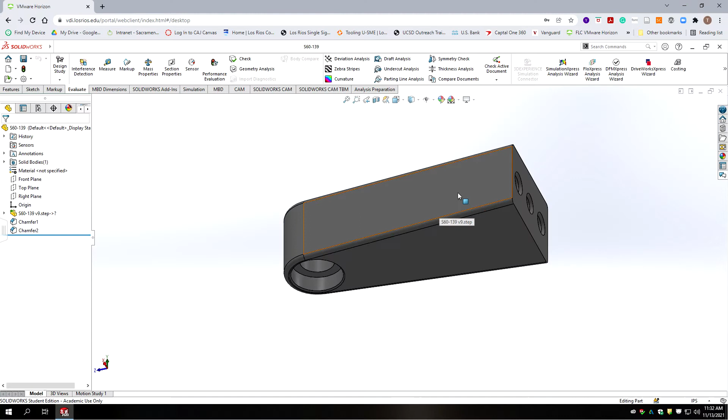So the method I will have you go through is a viable method to make this part, but there are different ways to approach this. Okay, so without further ado, we're going to move on. So we've got our part, and we're starting off with bar stock that's roughly the same profile as the footprint. I believe it's 1/2 inch by 2 inch, and it should be pretty close to our overall width here.

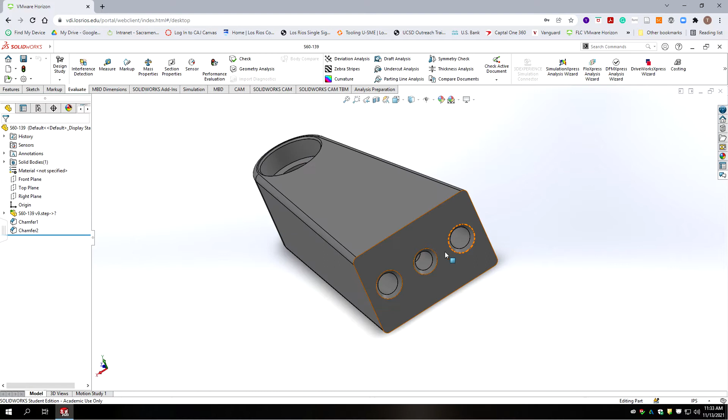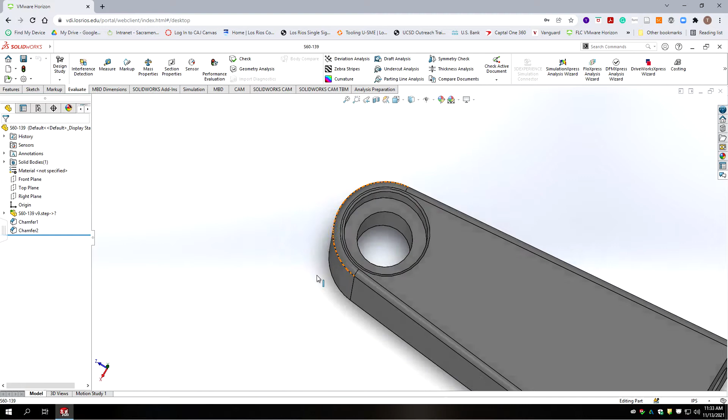We have 2 close diameter dowel pin holes and a threaded fastener hole in the center, which is a 6-32. Those are the same scheme as we used in the plate that this mounts to. We've got a loose tolerance 1/4 inch hole here, which we'll drill, and then we have a tight tolerance bore here, which we're going to approach carefully. And then we should have a 30 thou round going around the outside edge here, and we're going to use a corner rounding end mill to achieve that.

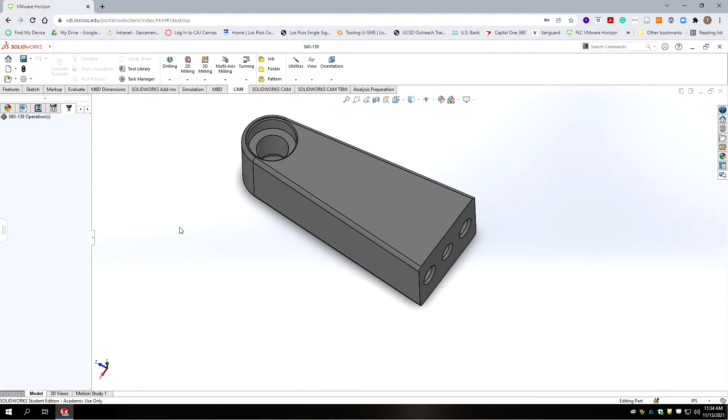So I think the minimum number of setups for this part is 3, so let's go ahead and create our 3 setups. Our first setup is going to be roughly in the position that we are now. So bar stock, perhaps on a vise with the right hand end sticking off the edge of the vise so that we can mill that face nice and square to all the other features.

All right, so we're going to highlight our operations. We're going to create a job, and that job is going to be S60-139 OP1. And we're going to use a relative size box, and we are going to use some extra material. So our additional stock, we're going to select all sides, but we're really only going to add it in the x-axis. Actually, we're going to set our origin first. So we're going to do z-axis and y-axis. We don't really have a good x-axis reference other than these holes.

Okay, so our z-axis is going to be the face of the part, and then our y-axis we're going to set as a vertical edge on the part. And so we get our trihedron where it's supposed to be, with x pointing to the right, y pointing away from us, and z pointing straight up in the orientation of the spindle. We're going to use a stock box point, and we're going to use the bottom corner 3, and it puts it at the bottom of the part.

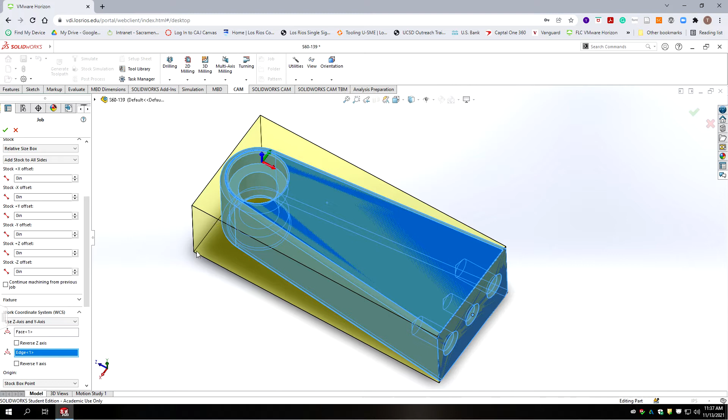Okay, so scrolling back to our stock, it's a bar stock, 1/2 by 2. But we're going to extend the ends as if we would cut this on a bandsaw, and it's rough stock. 30 thousandths, so a total of 60 thou. Okay, so that represents our stock with a little bit of margin on either end.

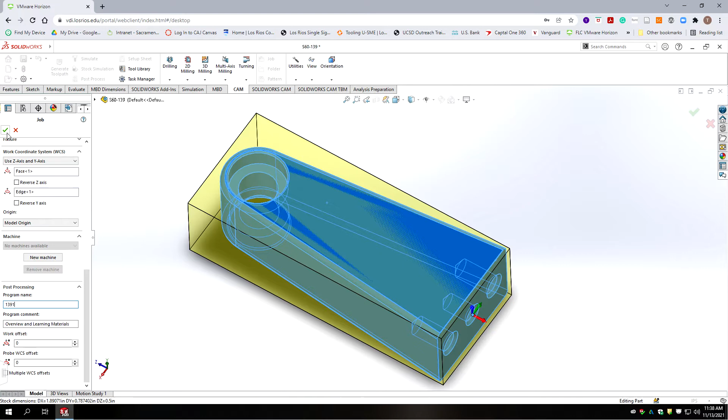And then our program comment is pretty much going to be the same as what we had up here. Program name is going to be 1391, the first program. And then we'll go ahead and hit accept on that. Now let's change our job folder to S60-139 Op1.

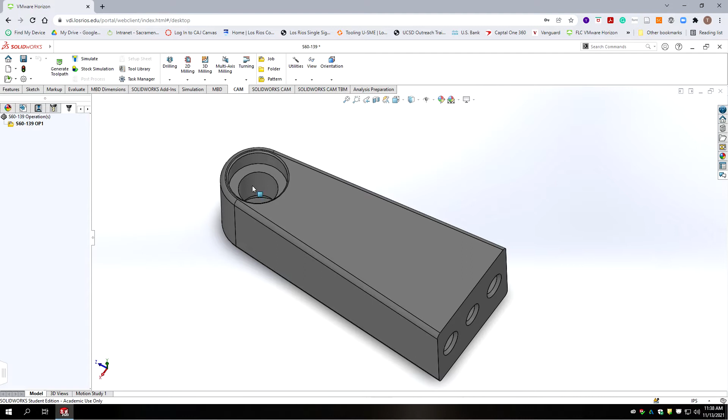Let's go ahead and start programming this. And for our Op1, if we're holding this in its rectangular stock like we have shown, it's held in a vise, perhaps we hold on to the first quarter or eighth inch of material. We don't want to cut all the way down to the vise, so we're running the jaws around the profile. So what I suggest we do is we have the end hanging off. We can cut that face all the way down to the end, which will make it square and parallel.

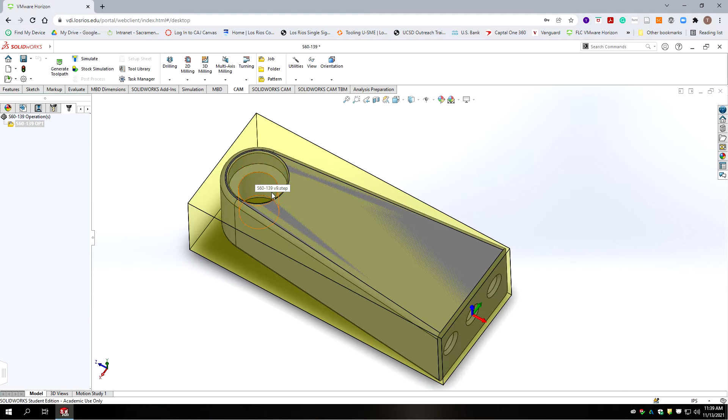And then on our second side, we don't need to machine that edge. In fact, that edge could be used as a datum. Okay, and then we have our hole. And then we have our counterbore on the one side. Now the counterbore is very precise, so we could use that for location when we flip the part. Yeah, I suggest we do that.

Okay, so what we're going to do is first we're going to cut the hole that goes all the way through. So we're going to do a spot drill, then we're going to do a 1/4 inch drill, and then we're going to come back with an end mill to make the pocket. And then the next step is we'll use that same end mill to run partially around the profile in depth and then machine off the side face of the part, so that's qualified.

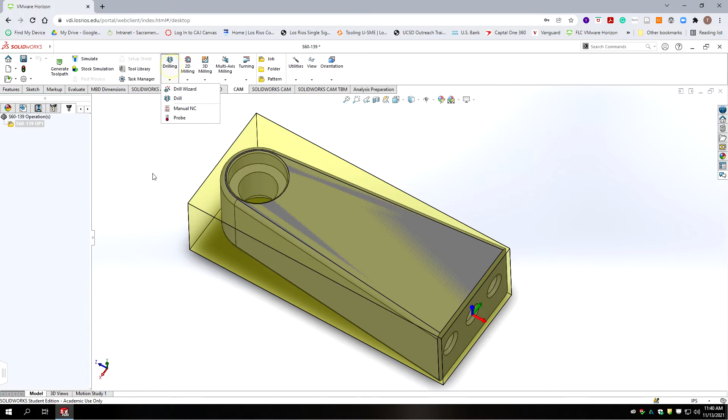And so in that setup we'll be establishing the distance between this face and the center of the hole feature in one setup, which is more accurate than if we do that in multiple setups. Okay, so now let's start, like I said, with the hole. So we're going to go to drilling, and we're going to do a drilling operation. And from our library, we're going to grab our spot drill, tool number 6.

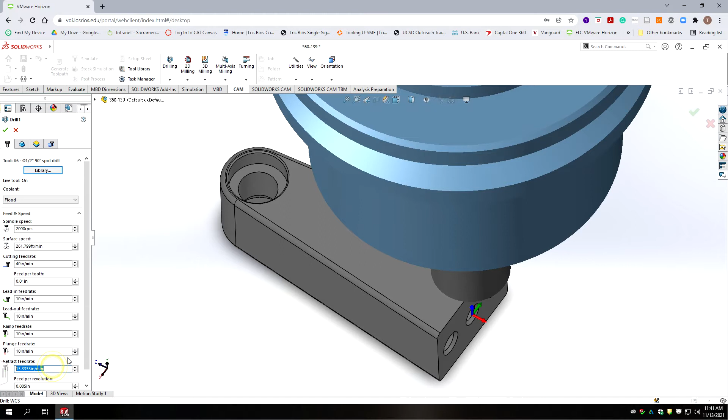Okay, and again, we're cutting steel, so we're going to slow our RPM down. And we're going to go to 10 inches a minute on everything. So we're going to go nice and slow with this cutter so that it doesn't flex, doesn't break the tip on it. Okay, we're going to go into the next step. And what are we drilling? Why don't we just select the chamfer? That's enough for the spot drill.

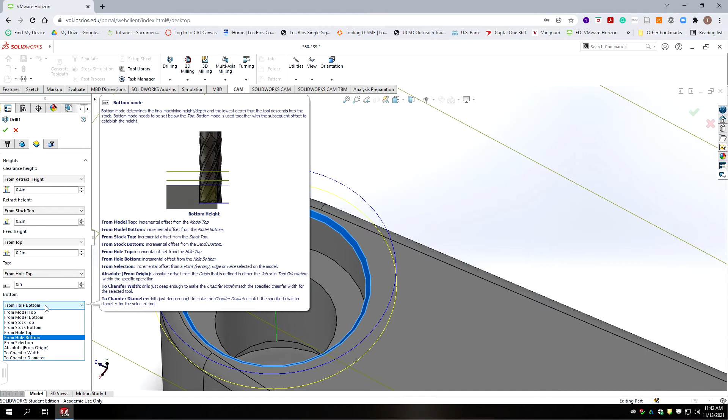We're going to go on to the next step. We'll leave all our heights at default, but we're going to go from the top of the hole and then our reference for the depth is going to be the top of the hole as well. And we're going to go to evaluate, and we're going to measure that diameter of that chamfer, and it's 400 thousandths. I'm just going to go and increase my significant units just to make sure.

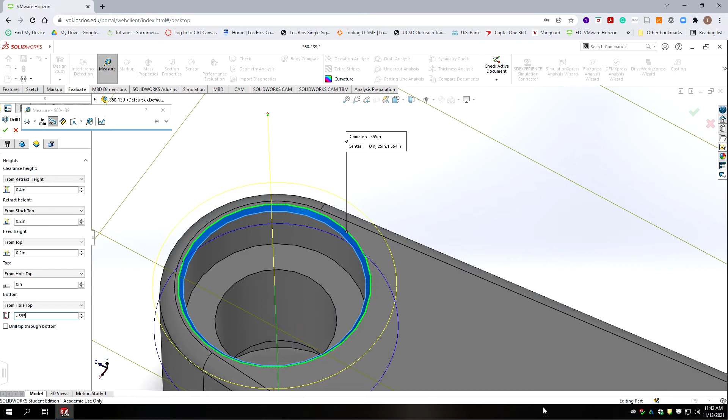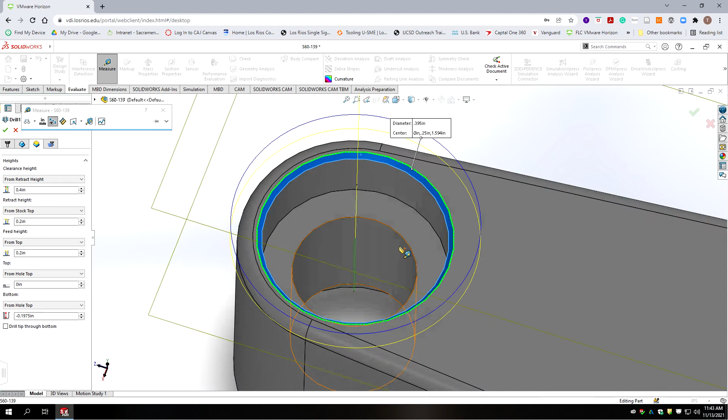Okay, it's 395 thousandths, so we want to go half of that. So we're going to go negative 395 thousandths divided by 2. Okay, and that should give us the proper depth to make the chamfer on this hole. It will also center drill enough that you'll still have a center point left for the 1/4 inch drill bit that goes into this. And it's possible we might actually be adding a slight chamfer to the edge on that hole as well, but that's not that critical.

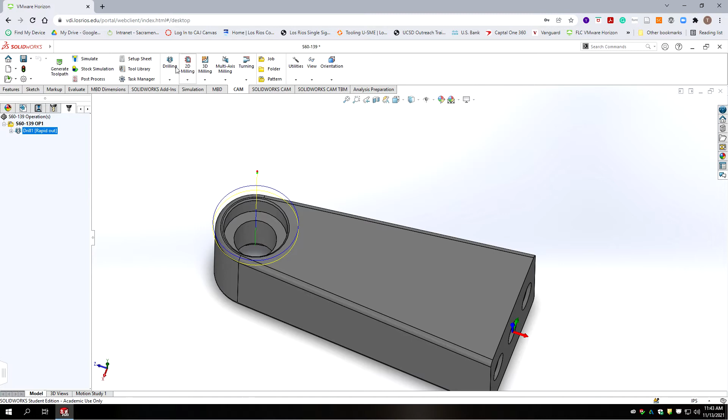Okay, so we're going to go on to the next, and we're doing a drilling. It's just going to rapid out. That's good. This is the spot drill. And we'll go ahead and accept that routine. Okay, the next step is we're going to drill the 1/4 inch hole. So that's the letter E drill. So go to drilling, drill. We're going to select from our library. We're looking for the letter E drill.

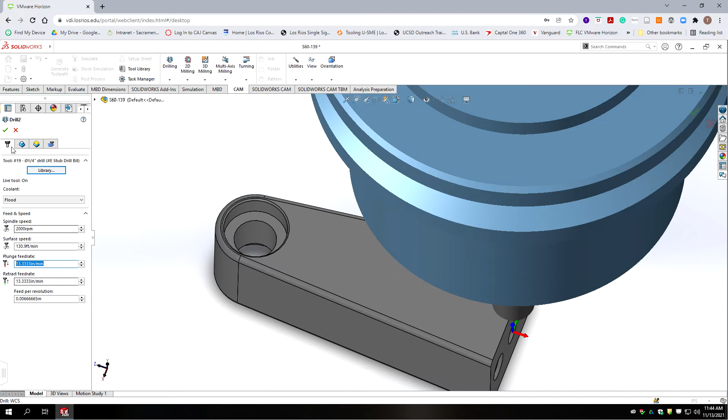Okay, and then again we're going to go down to 2000 RPM because we're cutting steel. We'll leave it at 13 inches a minute. It's fine. We're going to select the entire hole series. So we're going to get the chamfer. We're going to get the outside cylinder. We're going to get the cylinder of the 1/4 inch hole. And then we actually want to get the counterbore on the opposite side.

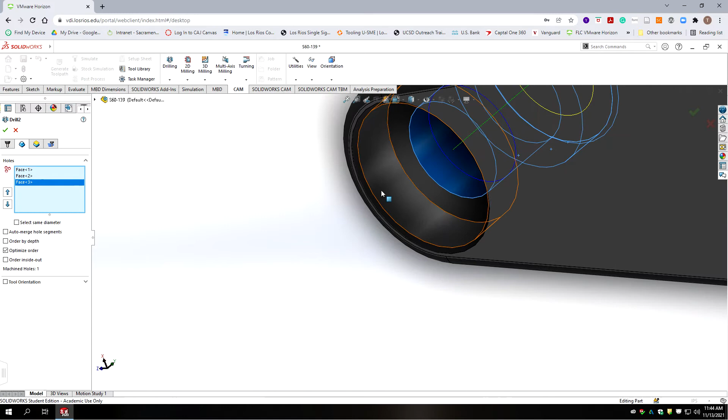In steel, a 4-flute end mill that we're going to use doesn't cut right on the center of the cutter very well, if at all. So we want to make sure that our drill bit goes all the way through so that when we machine from the other side, we have basically a pilot hole in the center to start with for our end mill. Okay, and we're going to auto merge those so it's all one drilling cycle. And then we're going to go to heights. We're going to leave the top two at default.

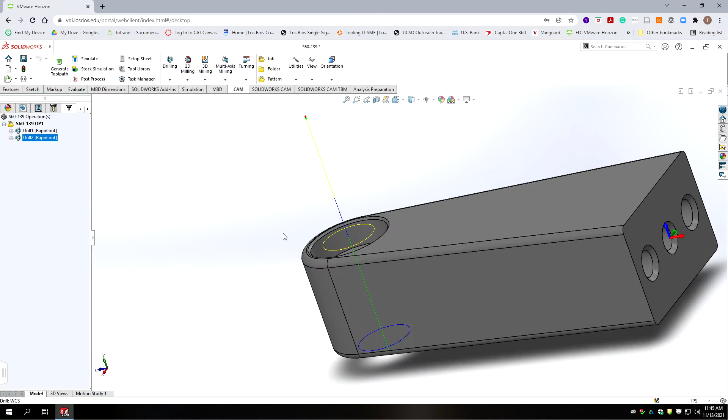And we're going from the top of the hole to the bottom of the hole, and we're going to have the tip go through, and we're going to go a little bit deeper. So we're going to go 0.01, ten thousandths deeper, just to make sure we go all the way through. Alright, so we got our 1/4 inch hole. Moving on. Now that we've drilled that hole, we're going to do 2 routines to make the counterbore.

The first routine is going to rough the counterbore, and then we want a separate routine that's going to do the finish cut. And here's the reason. This is a very precise size on our drawing, and it's for a press fit bearing. So we want to be able to separate out the code just for the operation that does the finish cut.

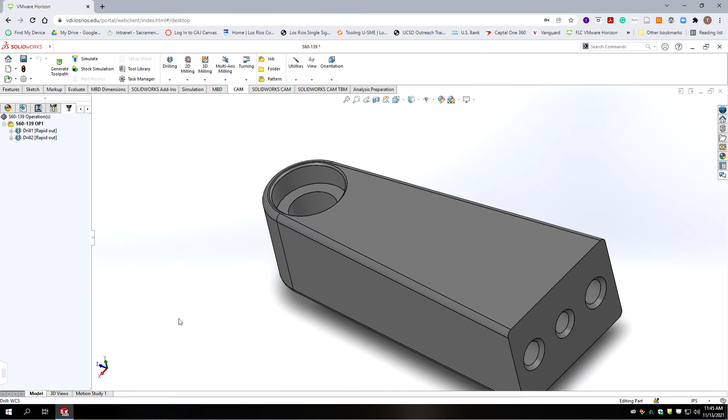So if we need to rerun just that portion of the program, it's separate, and we can either post it off or we can start the program at that point. And that'll allow us to do cutter compensation to slowly take a little bit more off and adjust that cutter on the machine. So we're going to go to 2D milling, and we're going to select pocket. Okay, and a pocket is going to take the volume and remove all the material.

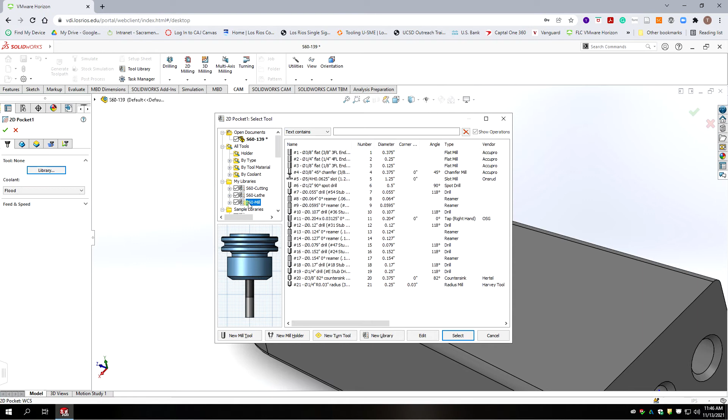We're going to go to our library, and we're going to select our 4-flute 1/4 inch end mill, because 4-flute is used for harder materials. We're going to slow the RPM down to 2500 because we're cutting steel. Our feed rate is going to be 15 inches a minute. Just go 10 inches a minute.

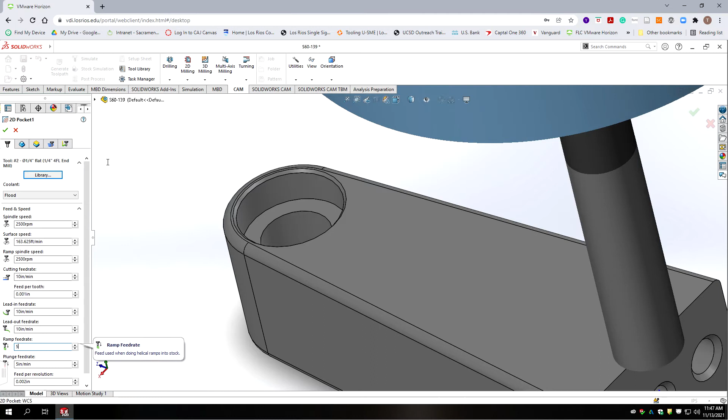Across the board. Now typically my plunge rate, I'll actually cut that in half. So let's put that at 5 inches a minute. And our ramp will do 5 inches a minute in case we are doing a ramp. Okay. Now we're going to go to our geometry and profile the bottom of the counterbore.

Go to our heights. We're going to leave the tops at default. We're going to start from stock top. We're going to go to the contour we selected. That's fine. We're going to the next tab. Stock to leave. We're going to leave a little bit of stock. 20 thousandths is fine. And we're going to leave 0 in height. We don't care so much about the height.

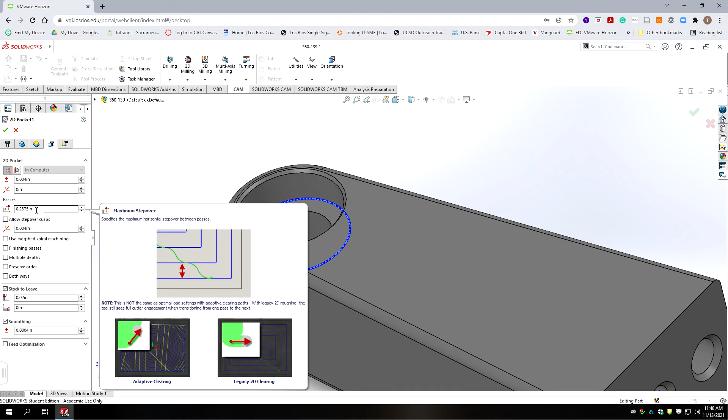Okay. We're going to select smoothing because we're doing a circle. We want the tolerance on the code to be pretty good. And we're looking at our tolerance there, it's fine. Our passes. This is a horizontal pass. Right now it's set at almost the diameter of the cutter. You never want to go more than 80% of the diameter of the cutter, and in steel, probably less.

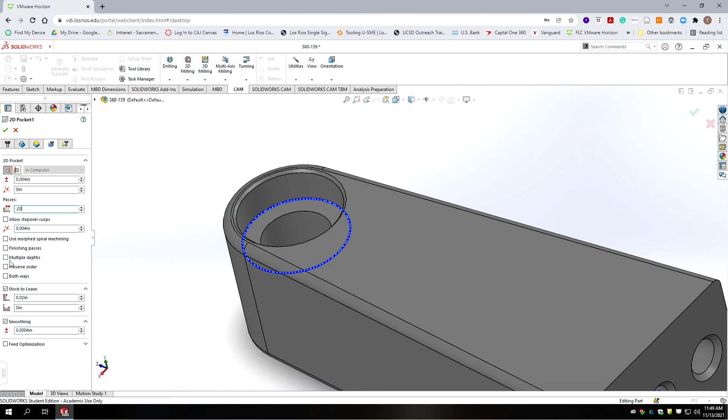So what we're going to do is we're going to decrease that. So if we go 0.25 and we multiply that by 0.7, let's say it's 70% of the diameter, we're at 0.175 step. I actually think that's still pretty aggressive. So let's set that at 30 thousandths side step. And we're going to select multiple depths. We don't want to take it all in one depth either.

So let's set our depth the same, 0.03, 30 thousandths at a time. And our finish pass at the bottom. Yeah, we'll go ahead and do a finish step down at the bottom, which is 5 thousandths. We're going to do one finishing step at the bottom, and we're going to do multiple depths, 0.03. We'll use even step downs.

And in this case, we're not going to do any extra finish passes, because we know we're going to come back and do another finish pass. We'll just do a finish pass on the base. Okay, we're going to go to the next tab. This all has to do with how it's going to lead in. So we got a lead in of 25 thousandths, 90 degrees. We've got a lead in.

We're going to get rid of the vertical lead in. Don't need that. It's going to be 0. And it's asking, how do we want to plunge? Do we want to come straight down? Do we want to ramp as a helix? So we're going to leave this at default, but a helix is generally what you want, and that way the center of the cutter is never really cutting.

Okay, so for this case, our 1/4" end mill, we've already drilled out most of the center, so I don't think we really need a helix. What we're going to do is we're going to do a plunge straight down. And that should plunge towards the center of the part. And it's going to start its plunge 100 thousandths above the workpiece.

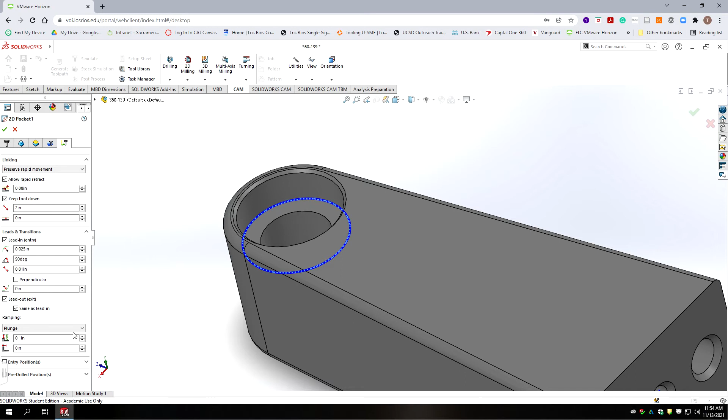There we go. So if we were to look at our toolpath, it starts in the center and it arcs in, arcs out, and does our roughing profile. Alright, so we've done our pocket. Now let's do a contour. It's just going to go around the outside and take it to finished size because we've left material on the exterior. So we're going to go 2D contour.

We're using the same end mill, same parameters. We're going to pick the same edge. We're going to go to heights, and we're going to leave these at default. We're going to go back to the contour, and it's going to be wear compensation.

Here you can override what the finish pass does at 10 inches a minute. We're just going to leave that alone. We are going to repeat the finish pass. We want a spring pass. This is something that needs to be very, very precise. And we're not going to do any roughing passes. We've already done that with the roughing tool.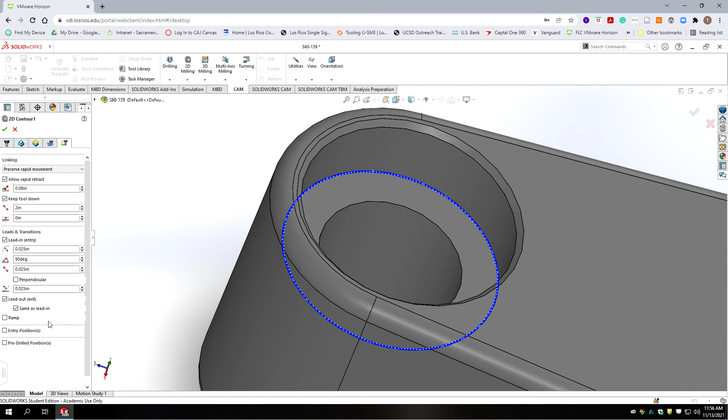Okay, we're not going to leave any stock to leave, and we're going to select the smoothing so we get a nice round circle. We're going to go to the last tab, and we're going to try leaving these at default and see how they work. Okay, we'll hit accept. Alright, so we have a ramp in, an arc in, and then we have a profile.

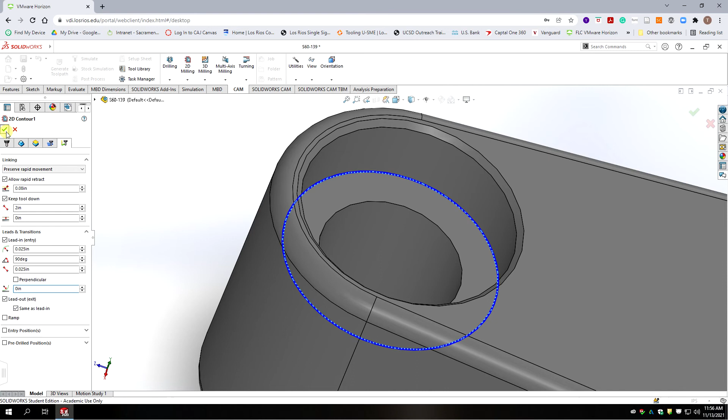Now I noticed something. I have my vertical lead in. I don't understand why they default to that. It breaks end mills, but HSM sure loves it. So we're going to get rid of the vertical lead in. Hit OK. There we go. So we're feeding in. We're doing two finish passes. It's going to repeat it 2 times, and that's going to clean that up to finish size.

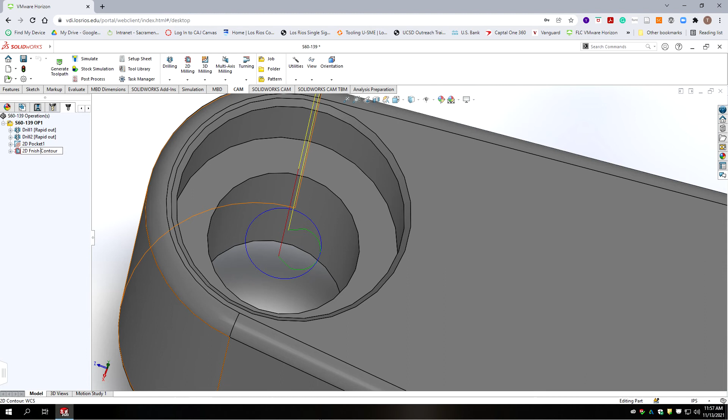So this is the routine that we might want to run over and over and change the cutter compensation on the machine. So we're going to change the name of this to 2D finish contour. And what that's going to do is it'll put it in the notes. That's done. Now we're going to move on to a little more profiling.

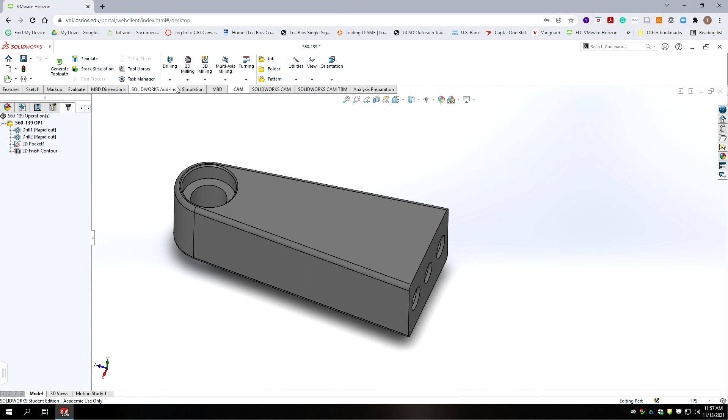So the next step is we want to machine off the end here. Okay, so we're going to use the same end mill we're using now, but we're going to do another 2D milling contour. Okay, and we're going to select the bottom edge of this. Now you notice I selected an arc and it did a blue line straight across. So right now it's going to default that edge is going to stop where my selection is.

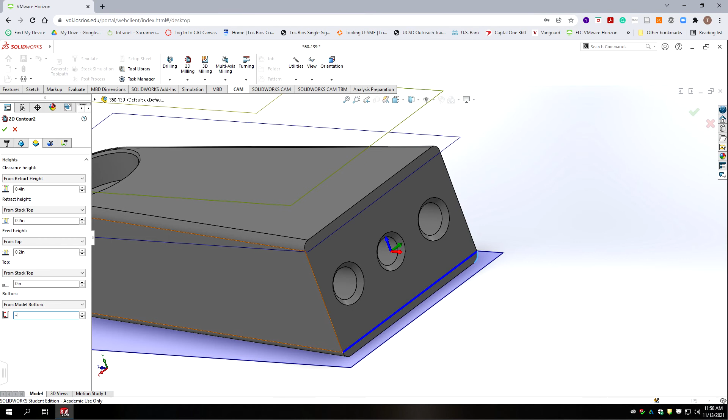So we're going to go to the next tab, and we're going to leave the first few tabs at default. Those are fine. And we're going from stock top, but we're not going to go to the contour. We're going to go to model bottom. And what that will do is our contour should keep cutting all the way down to this edge here. And then we want to go just slightly past. So we're going to go -0.01. Now we're going to set our steps for that.

Okay, so we're going to set this for wear compensation. And we're not going to do multiple finish passes, and we're not going to repeat the finish passes. But we are going to go along here. We're going to do roughing passes. And we're going to do a roughing pass that is 0.03. And we're just going to do one roughing pass. We're going to do multiple depths on that. The depth is going to be also a 30-second.

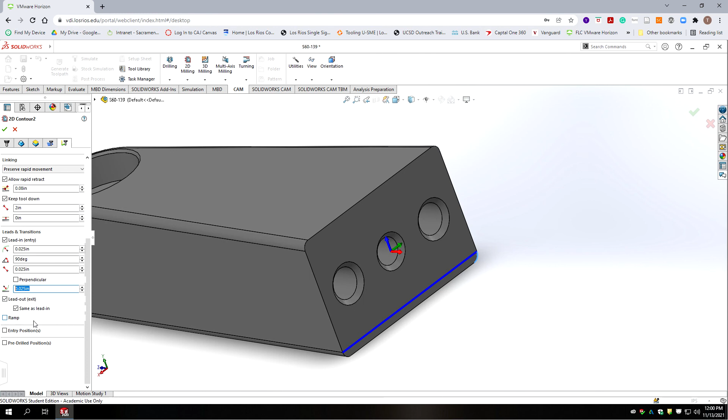And we don't really need a finish pass on the bottom, so we're going to leave that at 0 for finish passes on the bottom. You could put it in as a spring pass. And then we're going to finish pass only at final depth. We're going to use even step overs. And then that's it. Okay, so we're going to go to the next tab. And we're going to leave this all at default. Down here we're going to put 0 for our vertical lead in because we don't need that. And we'll go ahead and hit OK and see if we get the results we want.

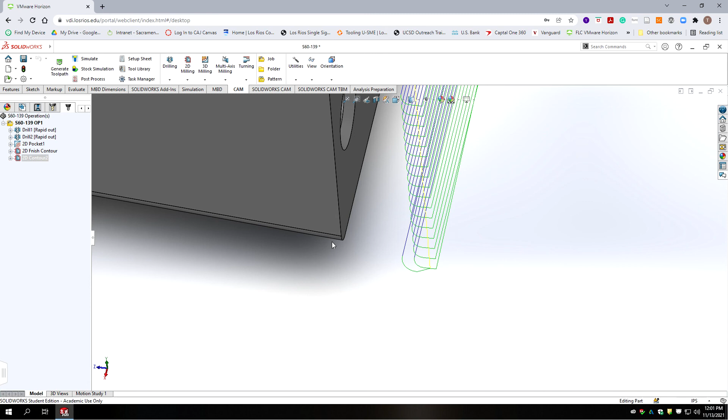Okay, so we have it arcing in and arcing out at the end with a lead in. And then at the bottom we do a finish cut that's all one cut. Now we may have an issue here. If we arc in and arc out using that as our profile, we may be arcing in and out before the edge of the material. So I'm going to suggest that we change these lead-ins, and you can see how they change. So instead of leading in an arc fashion, since we can come in from outside of the stock and move in, let's go to Edit.

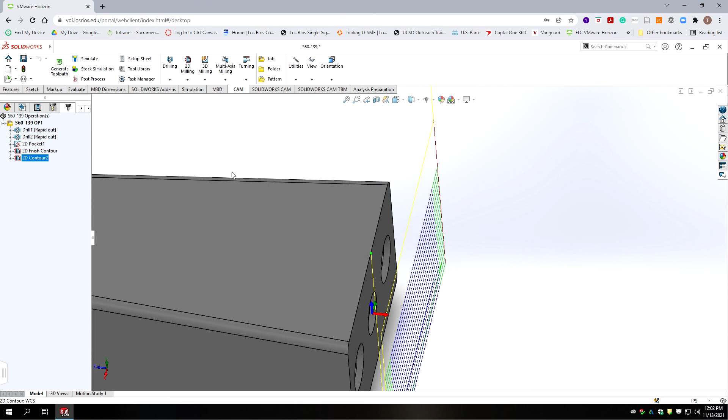Okay, instead of coming in at 90 degrees, we're going to come in at 0, and we're not going to have a radius. So we're just going to have a linear lead-in of, right now it's 25 thousandths. Let's increase that to 100 thousandths. And then we'll leave our lead out the same. Hit accept. Alright, so we're leading in off the workpiece, leading out off the workpiece, stock. We have a rough cut, and then we have a finish cut here. Alright, so we're done with that.